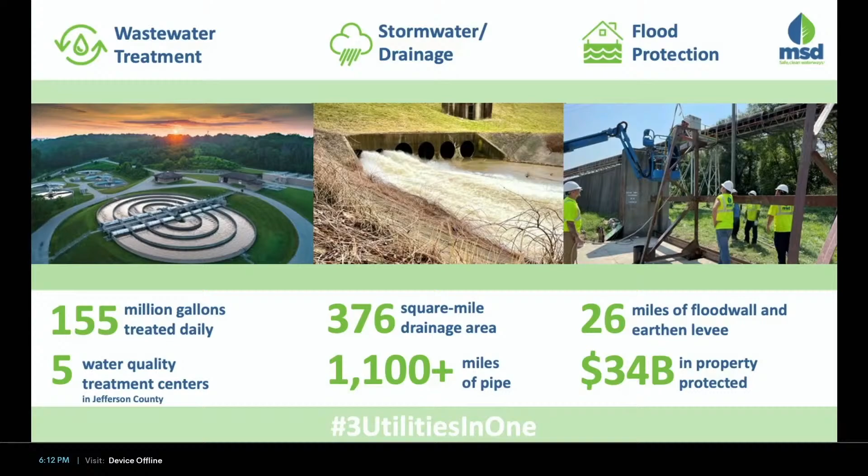That's why we're here today, as I said earlier, to talk about odors. We are committed to focusing on odors within the community. We created our clAIRity program so that we could work with the community and communicate to you what we're doing to ensure that we minimize odors as much as possible.

So what causes odors? Well, odors are just a natural result of sewage and other materials when they decompose. You think about a dumpster that's sitting in a facility, you walk past it, you smell it. Think about your own trash can by your home, you smell it. When things decompose, it causes this odor. Common places you might see it where it relates to the work that we do is at our treatment plants, our pump stations, some of our catch basins, and you'll even smell it sometimes in our creeks and streams.

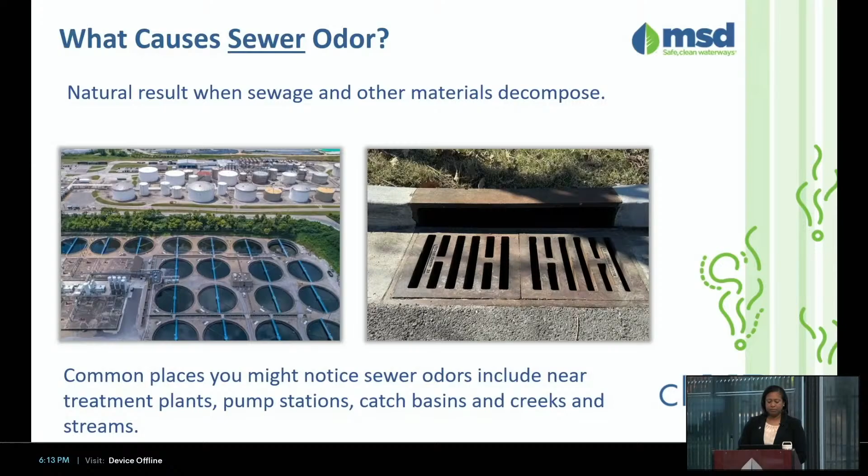So we've talked some about outside, and at times folks say, well, I'm smelling it in my home, around my home, et cetera. So what are some of those potential odor pathways that might cause you to smell it inside your home? Well, a catch basin on the side of the street, and we'll talk a little bit more about those. Downspouts. Some homes' downspouts are connected directly to the sewer system, which creates another pathway for odor. We recommend that you disconnect your downspouts from the sewer drain and seal them.

Basement drains. These residential traps are connected directly to the sewer system. So you want to maintain or repair those traps that are located under your basement floor drains. And the fourth one you see depicted here are your sewer vents. They're designed to assist your indoor plumbing with airflow to allow waste to flow freely through the system. These become clogged and can often malfunction. So you want to make sure you maintain and repair those as well.

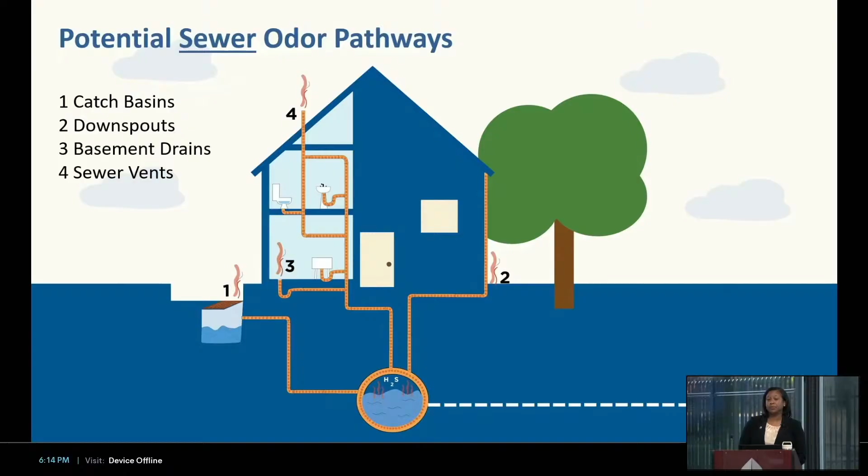But as I said, odors are natural, something that we deal with in the community in general. I mentioned the dumpster, but you also have odors sometimes in your industry, chemical plants. Sometimes near large streams and discharge sites, you'll get odors as well. So we just want to make sure that everyone understands that although we know there are odors related to the work that we do, there are odors that are not necessarily related to the work that we do, and that we're limited on what we can do with those.

What we try to tell everyone, if you're encountering odor that is not specific to MSD or the work that we do, make sure you contact the APCD, the Air Pollution Control District, and their number you can find on their website, and they're the ones that would be able to provide some support to you from that perspective. So we're going to focus on sewer odors because that's why I'm here, and that's what we're saying we're going to try to minimize for us.

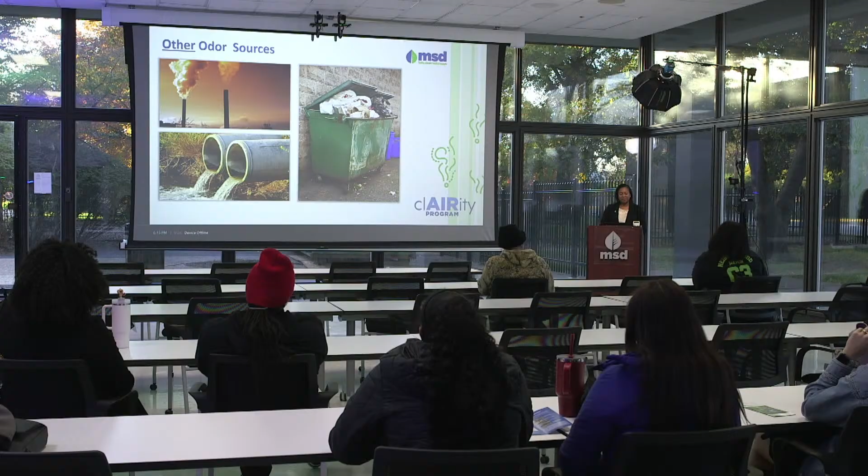So first and foremost, let's talk about odors in general, odor complaints. So in 2025, this is what we have to date. This is annual from January through October 30th at noon today. This is the number of odor reports that we receive from the community. And that's important for us because we need to know where those odors are.

We are working with a system that's ever changing. Every time it rains, every time someone flushes something, those things all change the system and what's happening in that system. So when you're experiencing odors, we need to know that. So we encourage you to report it. Let us know. Because until we know, it's harder for us to address those issues. And as you report it, it helps us to understand where we have more problematic areas.

From January through October 30th, you see there's 1,048 odor reports that we've received. One of the things I will also say is if you look at this map here, this is what we consider a heat map. And so the yellow areas are your more concentrated areas. So right in here, oh, you probably can't, can you see my mouse? You can or not, but you see where all the focused colors are?

Those areas there mostly within 264, kind of more of your downtown, West End kind of areas, you see that it's heavier colors there with that red and yellow. That's where we experience the most odor complaints and most odor concerns. And that's due to the fact that they are an older system and they are on the combined system. And that wastewater flows to our largest facility and our oldest facility.

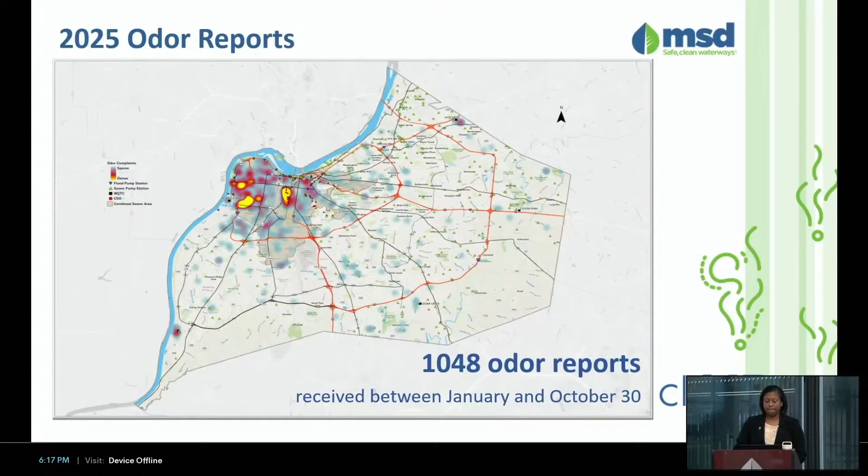So we'll talk a little bit about that combined system. Okay, there it is. For those of you that live in the combined system, you're like, well, what does that mean? I said it provides wastewater to our oldest facility. But what essentially it is, in that combined system, we have pipes that carry both your stormwater and your wastewater together. And so you've got all of that flowing through your system. My apologies.

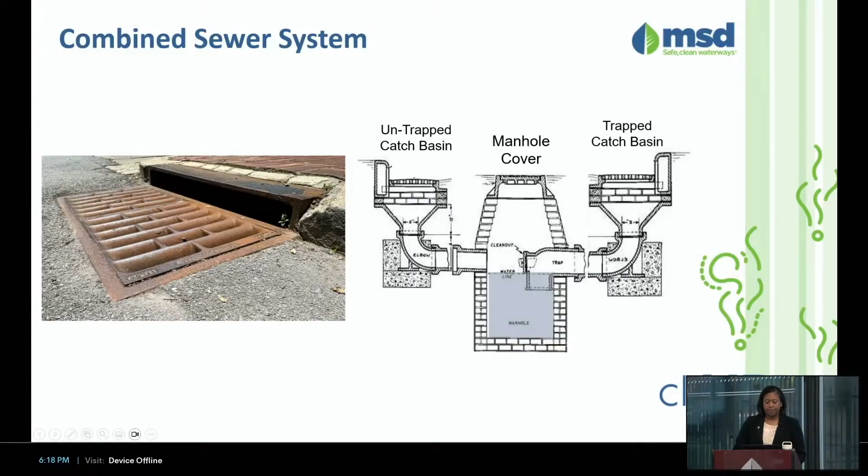Strange things here. Okay. So this picture here depicts a catch basin. And so one of the projects we're going to talk about a little bit more is the catch basins, because catch basins are an integral component of our system. And they're usually located at the edge of the street right here. And again, they can be a source of odors. So we've been doing a project to try to figure out how we can improve those catch basins that tend to have more of a concern from an odor perspective. And this is a good illustration here.

So if you think about your home, you think about your sink, and your garbage disposal, you think about putting things down, and we often talk about that water trap. I don't know if folks are used to that terminology or not, but there's an elbow in your sink, and that elbow keeps water. And when you keep the water in the elbow of that pipe, it prevents the odors from getting out and escaping through your sink. So that's essentially what we need to do for our catch basins.

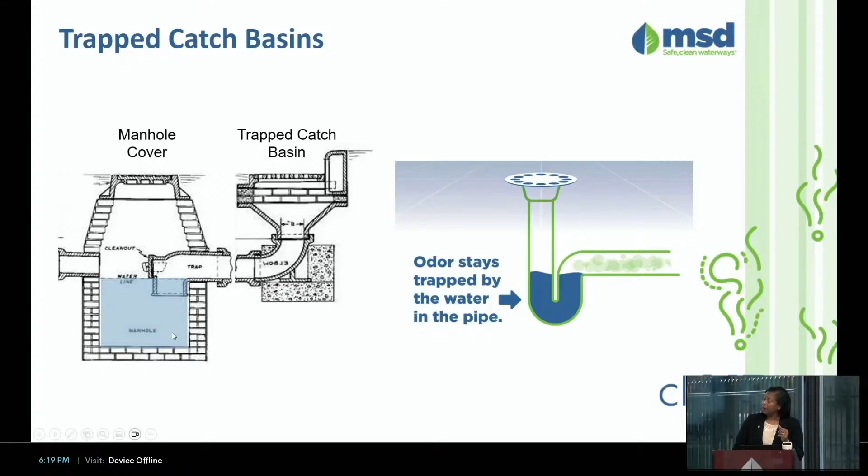Within that combined system, which naturally is going to have a little more odor to it, because again, it's combined, stormwater and wastewater, we want to keep a level of water in it, like is depicted here, so that the odors don't escape. And here's a picture of an untrapped one. This was actually probably not the best picture because it still shows that water, but in theory, you wouldn't have it, and then you've got the odor that comes out.

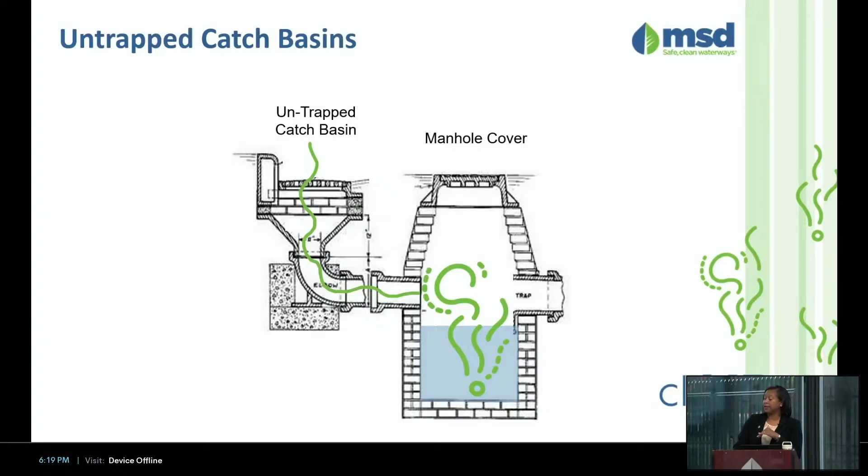So what we're going to talk about later is some of the projects we're doing to replace those catch basins that are untrapped and make them actual trapped catch basins. Again, so that we trap that water so that we can minimize the odors that are escaping. So water is important. We often hear people say, well, it was smelling, and then we had a big rain, and we didn't smell anything anymore. But that's because water is important.

Our wastewater systems are intended to be self-cleaning. So as it rains, all that water flows through the system, it cleans the system out, things don't sit, they don't become stagnant. But there's only so much water you can physically put in there from a consumption perspective. So this is a good picture here. A lot of times folks will say, well, just turn on the water, go out there and pour some water in there, all the above. Well, normal daily water consumption in our city is only 150 million gallons a day.

150 million gallons a day.

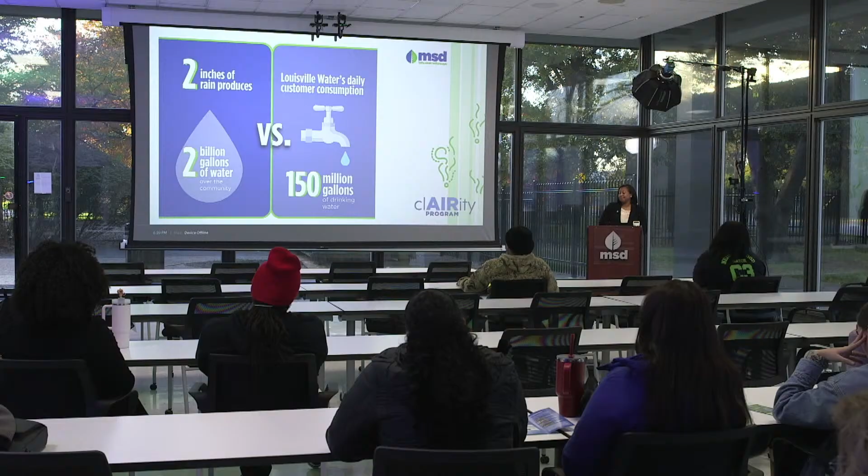A 2-inch rain is 2 billion gallons of water. So that's why rain is really, really important for us and helps us keep our system clean.

So what do we do? We've talked about the fact that we're committed to addressing odors. And one of the things we do is we try to make sure that we always respond. There are activities that we undergo in order to do that. Some of the mitigation activities that we have right now: every report that comes in, someone goes out, they assess it, and they come back, and they'll try to do different things. They might flush and deodorize the main, manholes, or catch basins.

We add water to the system in centralized targeted areas. We'll put a lot of water in there, again, to try to get things flowing, to keep it clean and fresh. And if we've got any kind of repairs or damaged plugs and catch basins, we'll do that as well. We also do some chemical feeding in our pump stations, again, to try to cut back on the sulfides that get generated in those areas as we're moving that water through the system.

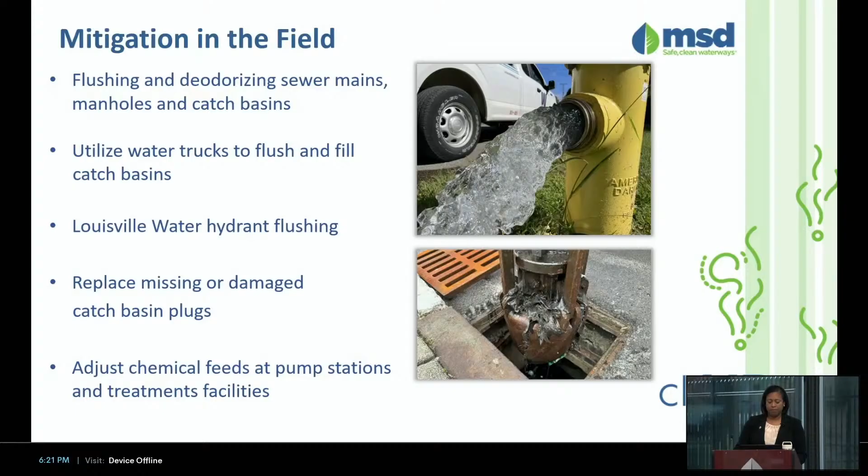And we do regular catch basin inspections and cleaning. We inspect and clean all catch basins in that combined system in a 15-month cycle. That's about 23,000 catch basins, and we're getting almost 20,000 of them a year within that 12-month period. And as we go out and we do those things, we come up with maintenance activities. We might need to do repairs, we'll do cleanings, we'll do whatever it is that we need. We might add it to a list of further actions that need to occur later on.

We've been asked this question: well, okay, 15 months, you're only looking at every 15 months? Well, we've got several catch basins out there. What we encourage you to do is if, in fact, you're walking around and you smell an issue from one of those catch basins, call us. You call us, we'll come out, we'll inspect it, we'll clean it, and we'll try to resolve that concern.

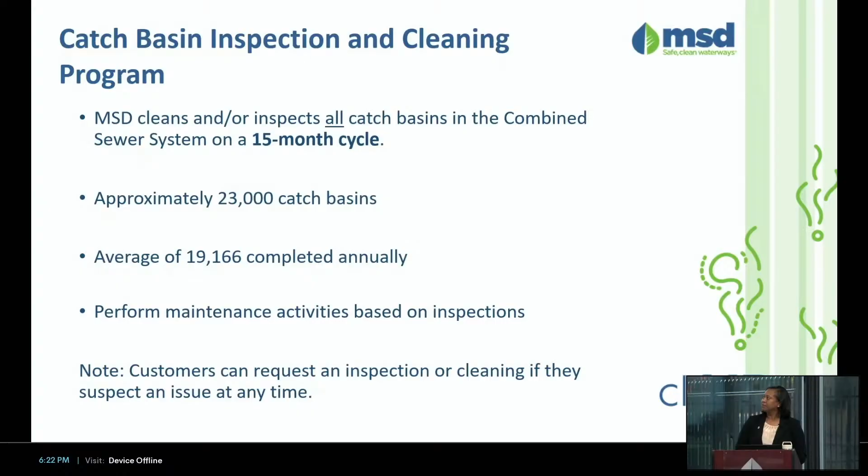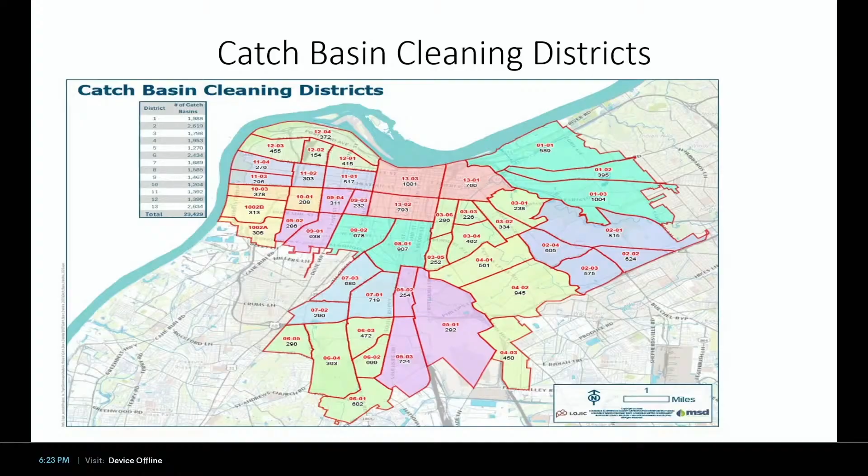This is just a quick picture that shows you the map and how we go around cleaning it. We have individuals that are dedicated to going through doing the inspections and cleanings of these catch basins because we want to ensure that we are maintaining these assets, particularly in the combined system because of the concerns we know we have with them. And you may have seen some of these before, but it's a little bit bigger. That first one here shows you how they're actually cleaning and pulling stuff out of the catch basins.

This time of year, one of the things I'll talk to you about is leaves. In your home, a lot of times folks will have leaves. If you go look at those drains at the end of your yard there, you might see them loaded with leaves and debris and a bunch of stuff that gets down in there. That causes problems, from a draining perspective and from an odor perspective. So we want to make sure those stay clean. If you're cutting your lawn or raking up leaves, pick them up. And if you see one that's clogged and it's really an issue, call us, so we can come out and clean it out and flush it for you.

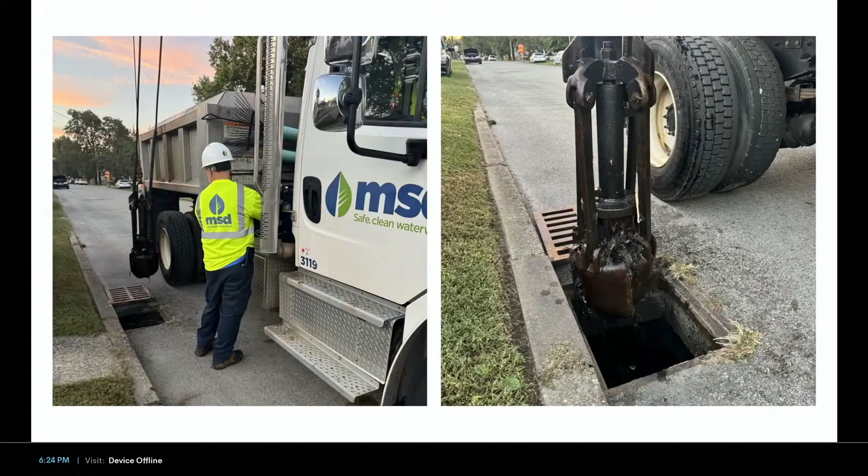I'm going to jump a little bit here. So I gave you some history. I told you, okay, this is who we are. We are committed to odors. These are the things we do when you call us. These are the other activities that we do.

And one of the things we did in September of 2024, we actually entered into an agreed order with the Air Pollution Control District. Again, this was another way for us to show our commitment to addressing odor in the community. Part of that agreement was that we would develop an action plan for longer-term projects. So I talked about our response activities, all the things we do daily when you call us when there's a need. And now I'm going to go through some of those longer-term projects that we've been working on. And with that agreed order, we'll continue to have these action plans with longer-term projects over the next few years.

All right. So quickly, a couple of things we've done thus far. Again, like I said, that agreed order was signed in September of 2024. Since then, these are some of those longer-term action items that we've completed. We did an odor control plan where we identified and assessed odor control issues at our second largest water quality treatment facility. We added odor control units to our southwestern pump station, which is actually off of Algonquin, thank you, Bells Lane.

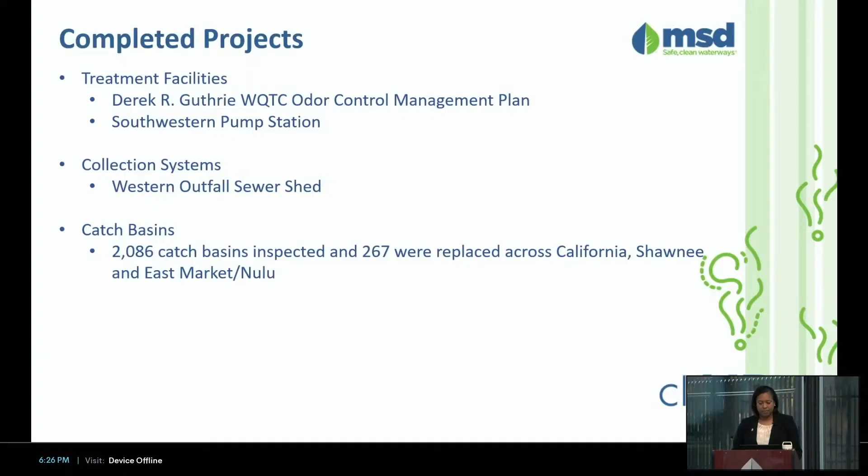So now I'm going to talk about some of the projects that are in progress. Again, as I said earlier, we have this agreed order. We identified these longer-term projects we're working on, and some of them pertain to our treatment facilities, some of them pertain to our collection system, and some of them pertain to our pump stations. And so some of the projects that are underway in our treatment facility,

Oh no. All right, my apologies for that.

Some of the projects that are underway in our treatment facility, so Morris Forman, you heard me mention the oldest and largest water quality treatment center. Well, that's Morris Forman. And it is down on the Ohio River in the West End area. You're probably familiar, it's in the Rubbertown area. And we have a multi-year project that we're working on to look at how to better handle our solids.

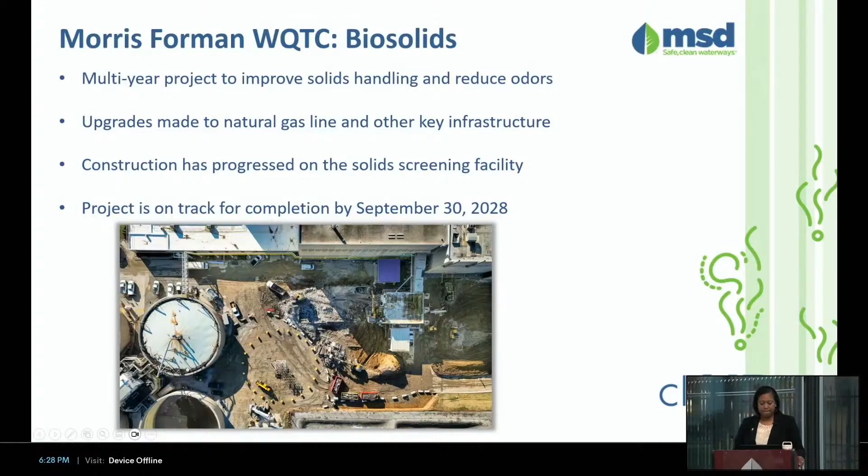We're also getting ready to install and working on a new system that will help clean the air by removing hydrogen sulfide from the digester gas. So within our system here, right now we've got this finalized design. We've selected a contractor, and we are projecting that to be complete by July of 2026. It will help reduce the gas waste and make it more of a cleaner energy source for us.

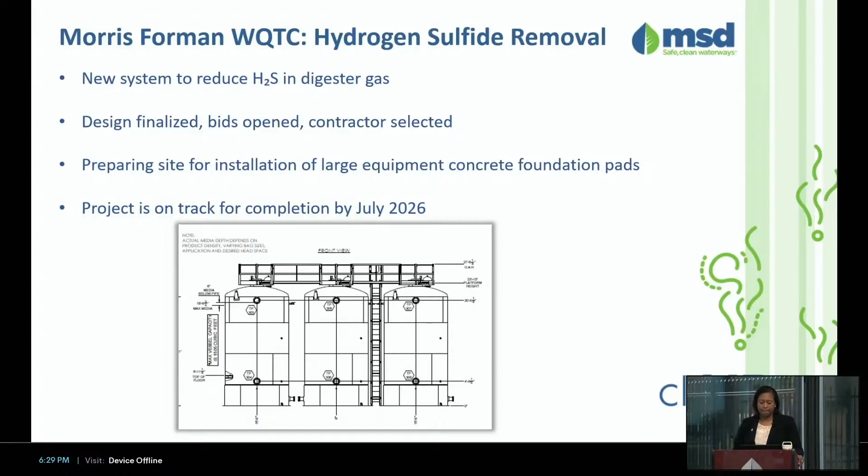Our sedimentation basins. So we've got 4 sedimentation basins at this facility. And part of the project we did was to improve that. So what it'll do is it will provide us with improved efficiency, as well as minimize some of the concerns we have from an odor perspective as well, to help address that. We are well underway with finalizing that work. We've got 2 of the 4 basins already rehabilitated and in service, and we're actively working on the last 2 now.

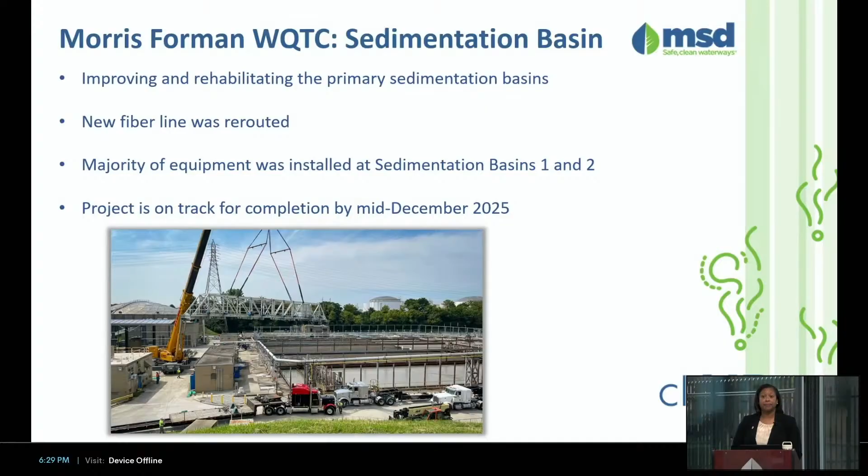So I talked about the collection system, but I don't know that I explained what the collection system is. So it essentially routes the wastewater from the homes and businesses and industries to the water quality treatment centers. That system of pipes that carries that water. And so when I mentioned earlier, there was a pipeline that runs from the middle of downtown, Maple Street area, all the way down to the park. That's what I was talking about. I was talking about the western outfall. That's part of our collection system that moves that water down so that we can get it to the treatment plant to treat it before it's discharged.

So within the collection system, we have some upcoming projects. You heard me talk about how we did a study for that line that runs down Broadway. Well, we're also doing studies on the Ohio River Force Main, which is a little bit further north of our service territory, as well as we're going to be doing a chemical use study for our Grand Avenue pump station. So we currently are using a chemical, it's called Bioxide, at Grand Avenue.

And what we're doing now is some analysis to see if we can find a better chemical to use at our pump station that will keep the sulfides down, so that that water, as it carries down our collection system, will be less of a concern further down in the neighborhoods and communities.

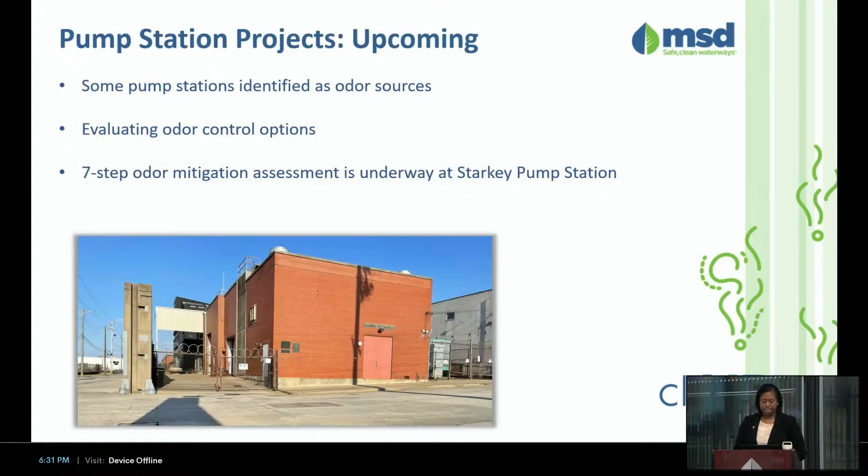I've talked a lot about catch basins, and I said we had about 23,000, I think was the number, within the combined system, but we maintain more than 40,000 catch basins in the city and county. And we are actively prioritizing looking at the replacement for those. Those are usually right there at the street, right at your home. And so we want to ensure that when you're calling us for a concern with those, that we're able to address those. Again, it's a big part of our response activities, but it's also a big part of what we're doing for replacements. As I spoke about earlier, we replaced 267. So we will continue that work.

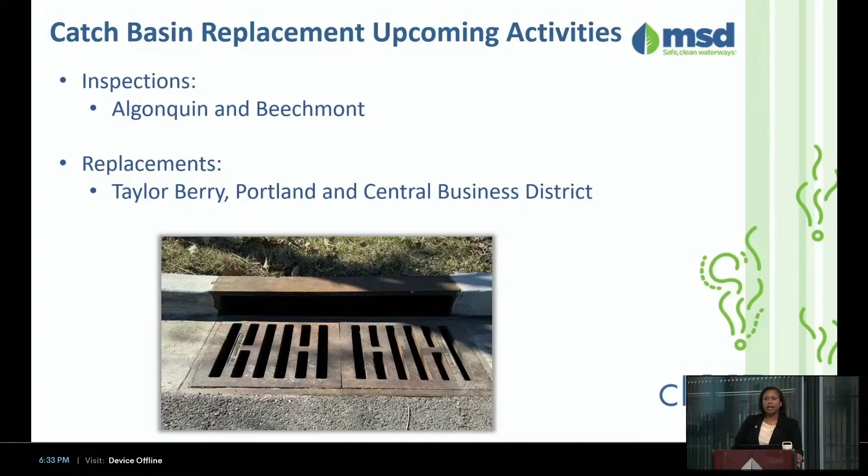We are doing inspections, and Algonquin and Beechmont are up next. We'll continue to work through all these areas in our combined system. Replacements are underway, or will be underway, in Taylor Berry, Portland, and the Central Business District. Again, as we continue to work through our list, we're trying to identify those areas that are heavier concerns with odor. We're inspecting those and prioritizing replacing those. Catch basin replacements have begun. I think we've got about 14 identified for Taylor Berry, 366 for Portland, and 282 right now showing for the Central Business District.

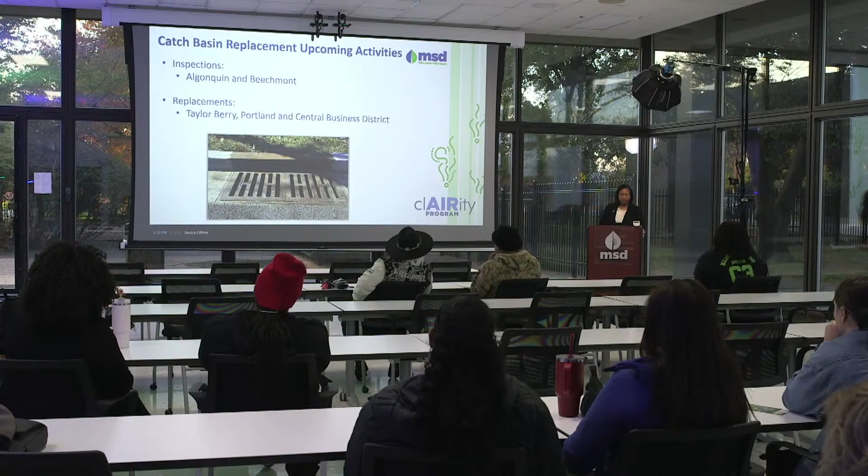So, you've heard me talk about who we are as MSD, right? I also talked about our commitment to odors. I really wanted to express upon you the importance of helping us to mitigate the concerns that you might be experiencing. So please call us if you have a concern. You can email us. You can go to our website, louisvillemsd.org. There's plenty of information on there to report an odor. If you want to see more about the project items, the action plan is out there, all of the above. We have a dashboard with some data information out there for you as well. It's important for us to know when you're having a concern so that we can try to address that concern.

Although this is our last community meeting for this year, our clAIRity meeting, we are still available to come to your neighborhood groups, community meetings, district council meetings. We've done several of those, church meetings, any of the above. If you are talking with someone and they say, I've got odor issues, please have them call us. The more you let us know and the more specific you are about what you're smelling, when you're smelling it, even the location, the easier it is for us to try to address that concern. You can also email us at this address.